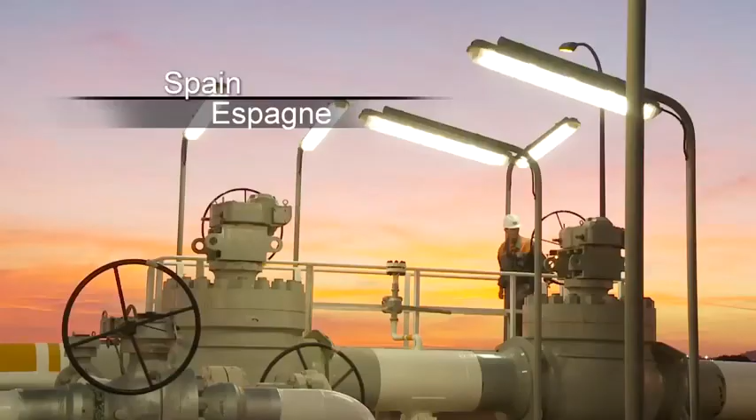The Medgaz project is ambitious. It is a system of transporting natural gas from the producing country, Algeria, to European consumers.

In Algeria, we conceived and constructed a compression station at Beni Saf, situated by the Mediterranean Sea, some 80 kilometers from the city of Oran, 60 from the Moroccan border.

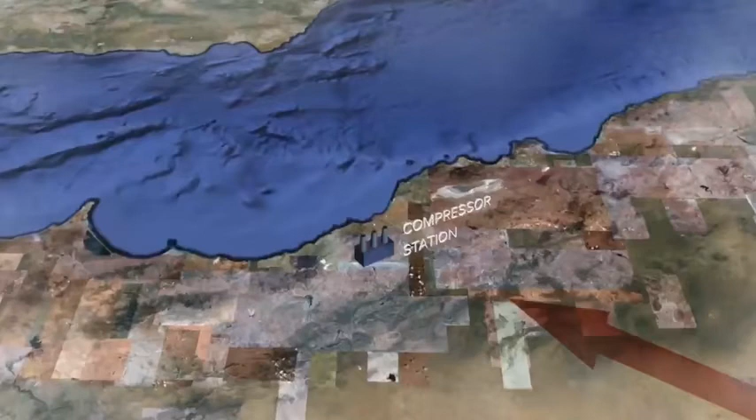The station is supplied with natural gas from Hassi R'Mel by a 48-inch gas pipeline at a pressure of 40 bars. The gas is compressed to a pressure of 200 bars to allow it to cross the Mediterranean Sea to Spain through a 220-kilometer-long 24-inch pipeline submerged to a maximum depth of 2,200 meters.

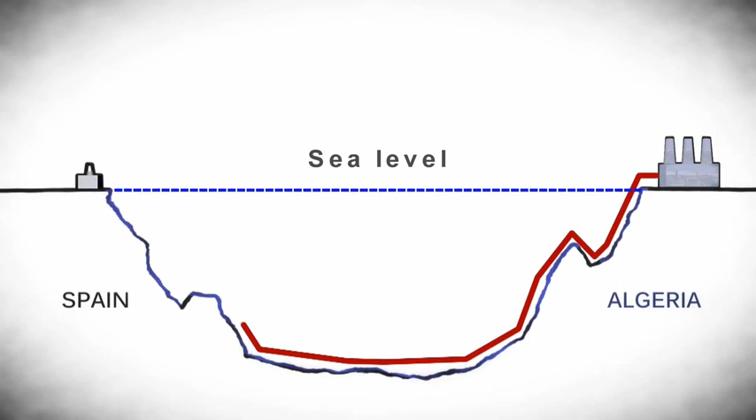A veritable issue, Medgaz will allow a continuous, reliable provision of clean energy to Europe. Declared a priority interest project for the trans-European network in the energy sector by the European Commission, Medgaz answers the growing demand for natural gas throughout Europe.

Made up of Algerian, Spanish and French shareholders, our client Medgaz SA, a company incorporated under Spanish law, has brought together a high level of expertise in technical and human resources through a number of highly reputed international companies.

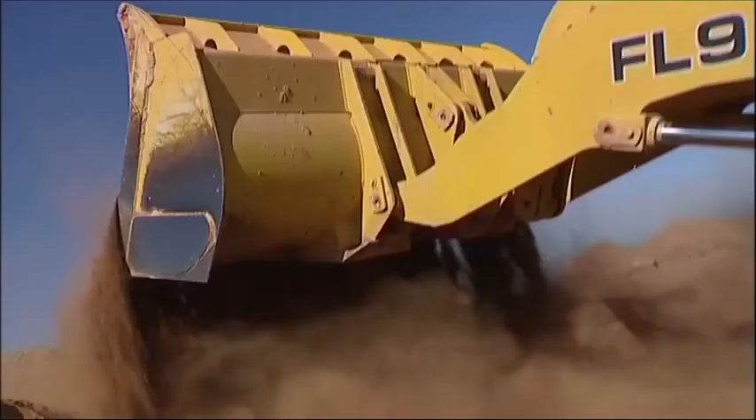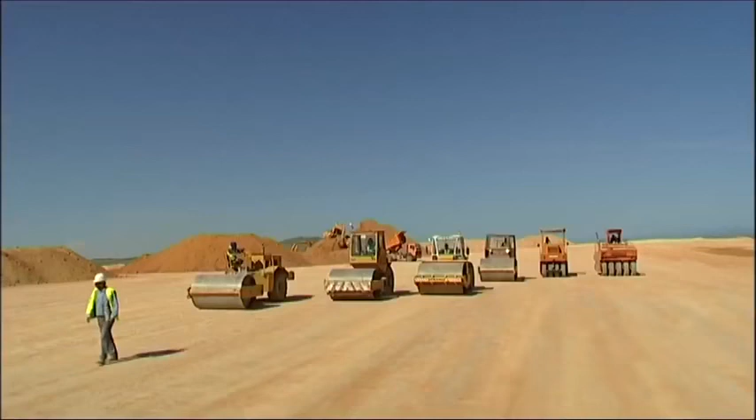SPIECAPAG, in association with a Spanish partner, participated in the project by constructing the compression station at Beni Saf in Algeria.

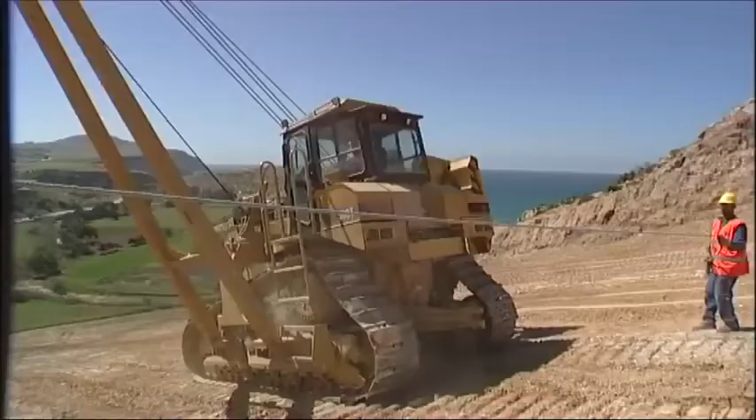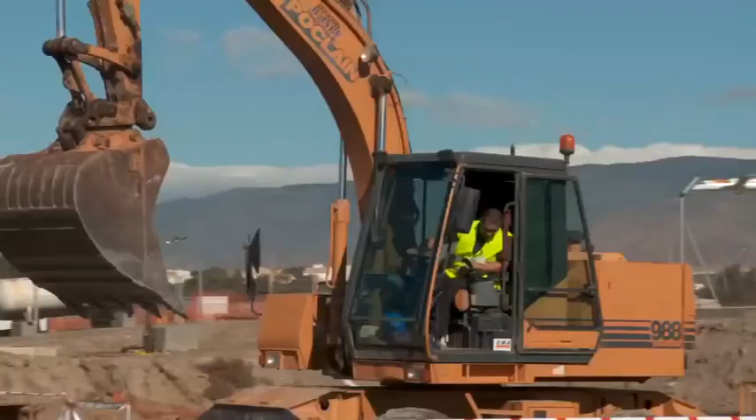This EPC contract, engineering, procurement and construction, was signed in 2006 for a value of 110 million euros, excluding the turbine-driven compressors. A receiving station, OPRT, was also constructed near Almeria in Spain for a value of 40 million euros.

These two stations are connected by an offshore pipeline with a capacity to transport 8 billion cubic meters of gas per year in the first phase. This will increase to 16 billion cubic meters in the second phase.

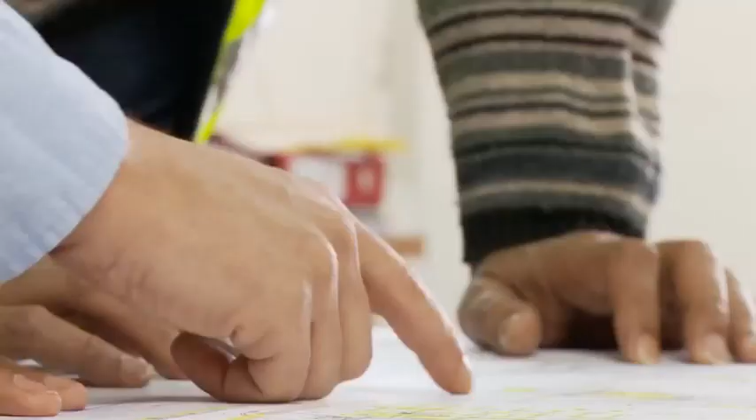Project management was installed in Madrid, close to the client, to supervise the engineering, procurement, as well as the inspection and transportation of the equipment. 160,000 hours of engineering were necessary to design the two sites.

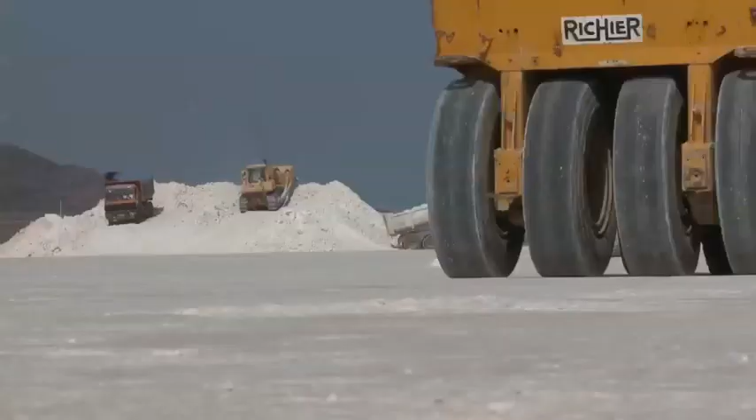No frontiers for procurement. Equipment came from around the world: England for the turbines, France for the skid gas and compressors, Germany for the drivetrain of the turbines, the US for the turbo generators, Spain for the valves, cables and electric panels, Korea for the tubes and the air coolers, and finally Italy for the bulk materials. The customer and certification organizations participated in each of the factory inspections.

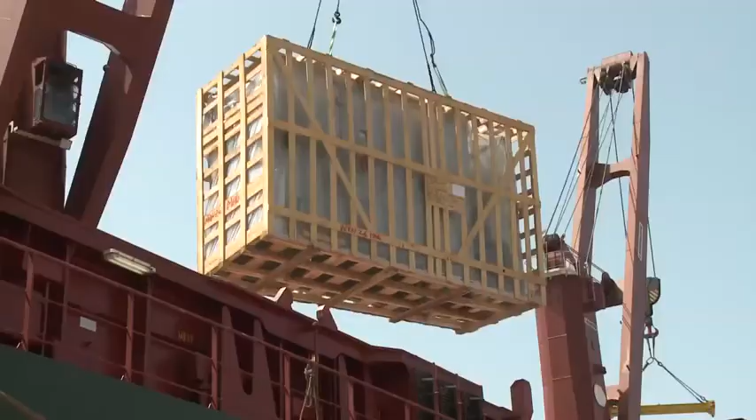Most of the equipment arrived in Algeria by ship. The port of Arzew, to the east of Oran, was chosen to handle the largest pieces of cargo. A project-dedicated office was an essential tool in clearing materials through customs. Every day during the operation of the worksite, tons of equipment passed through here before being transported by road to the site at Beni Saf.

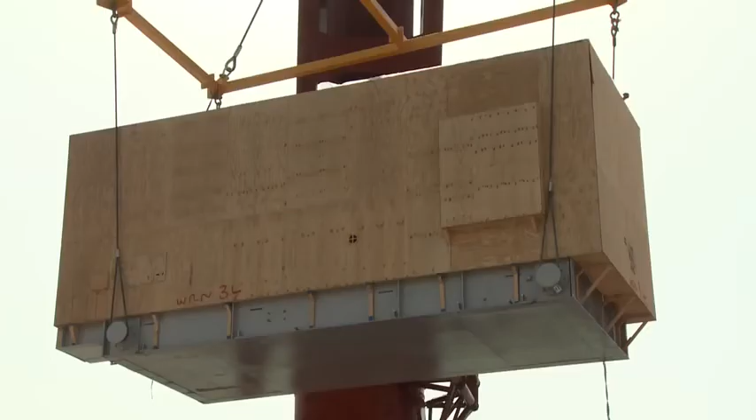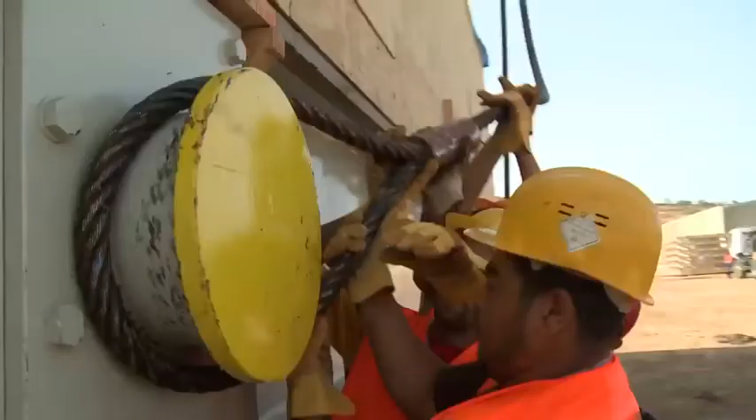August 2008: the 3 turbines and 3 compressors arrived on Algerian territory. Abnormally large crates of about 60 tons each were then transported by exceptional convoy to site, situated about 100 kilometers from the port.

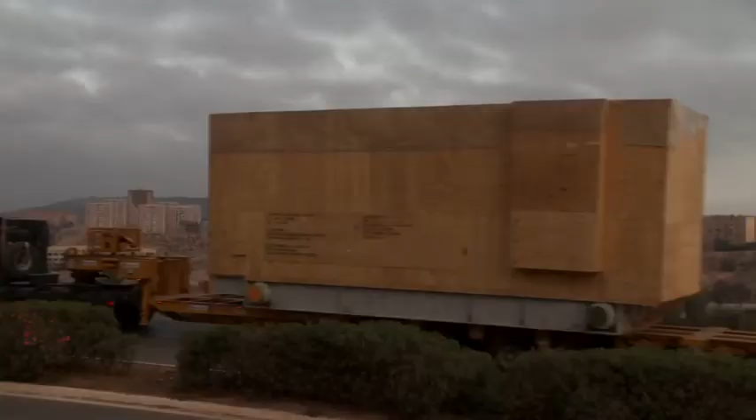SPIECAPAG set up a number of exceptional organizational solutions to ensure that the equipment was delivered to follow the progress of the works. The turbines and compressors are the key pieces of such a project.

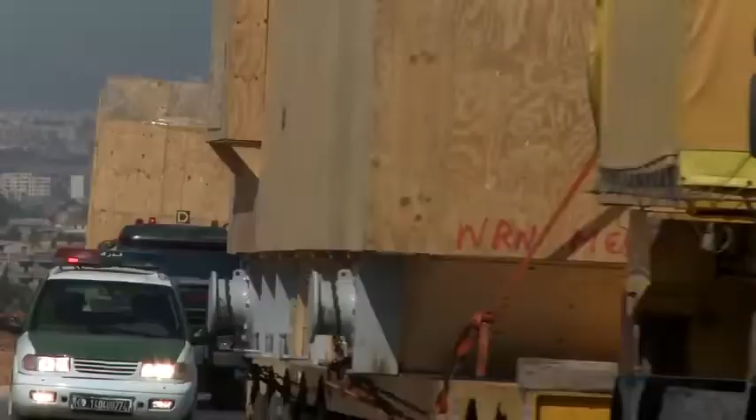Their installation determines the subsequent continuity and progress of the construction works. It's by sharing expertise with its partners that SPIECAPAG accomplished each of the crucial points in the construction of the project.

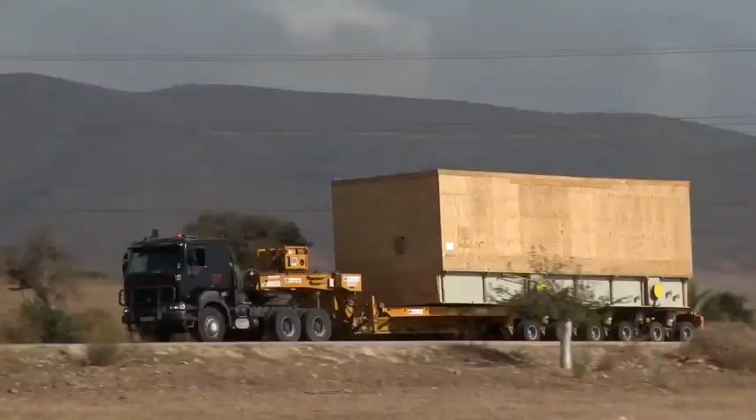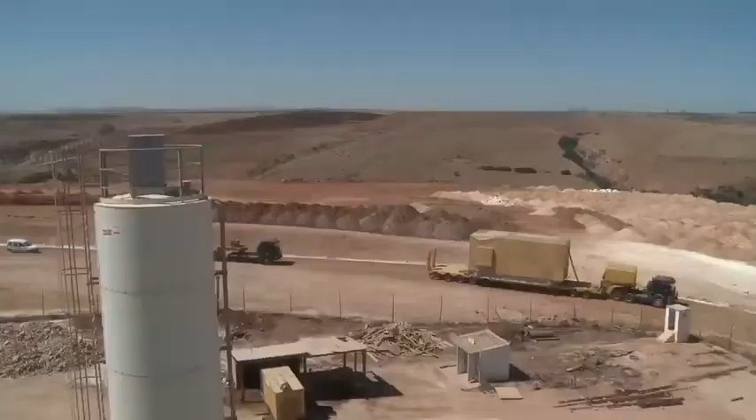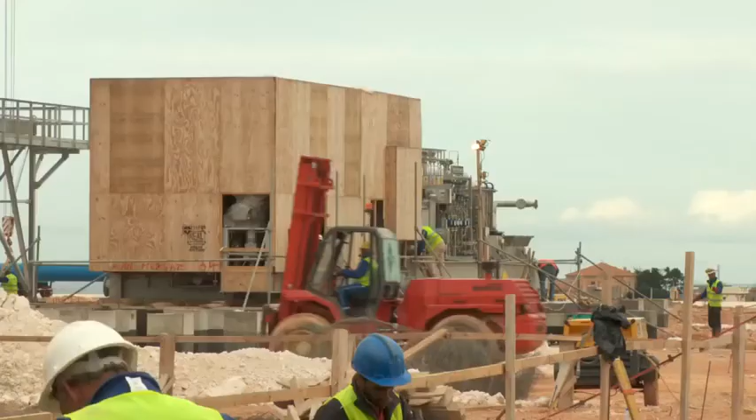At the end of a two-day trip, the 400 tons of equipment was delivered to the site. The BSCS compression station covers an area of 14 hectares.

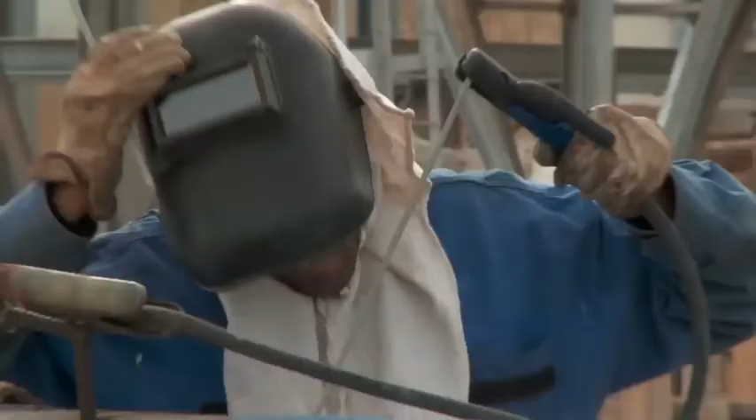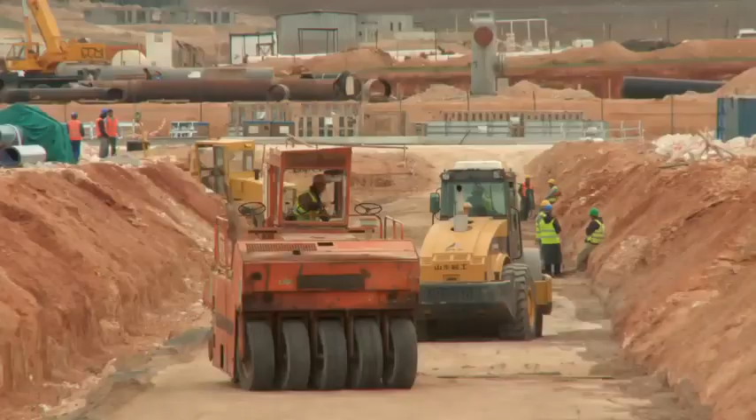All these figures make Medgaz an exceptional project.

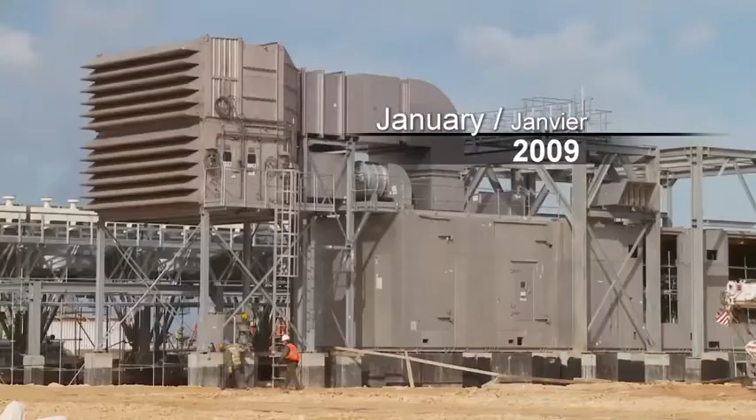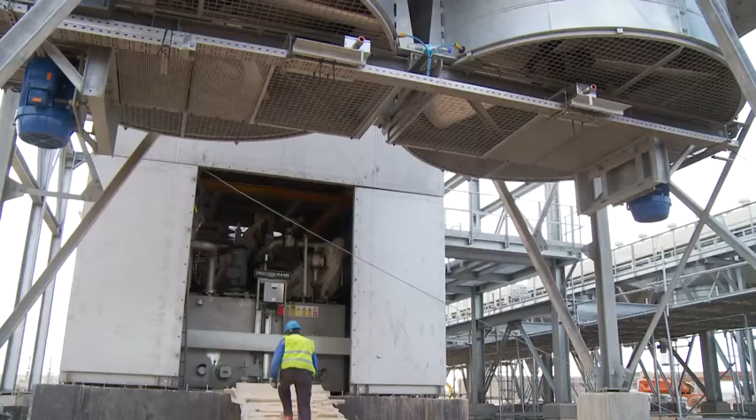SPIECAPAG, a worldwide leader in pipeline construction and associated infrastructures, has developed a unique expertise in work studies and coordination of subcontracting organizations. An industrial compression station is technically a complex work. It represents 120,000 hours of studies.

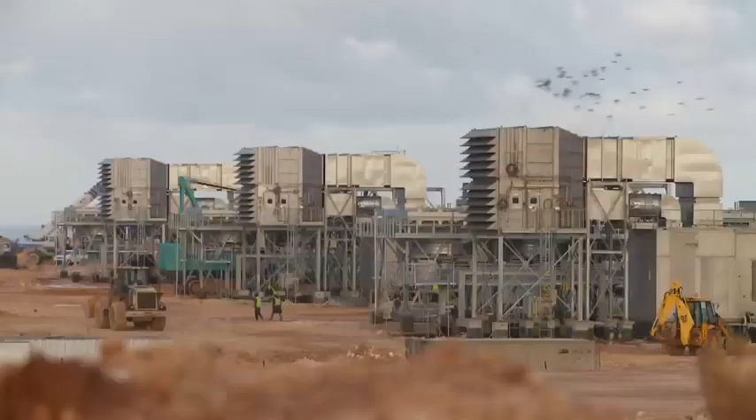In assisting the client, SPIECAPAG develops a complete mastery of work and responds to the most constraining requirements at the highest level of performance. In the end, the two stations of the project represented close to 5 million working hours.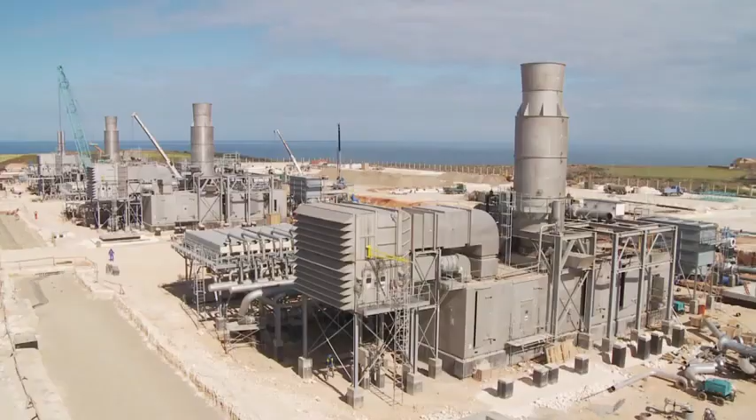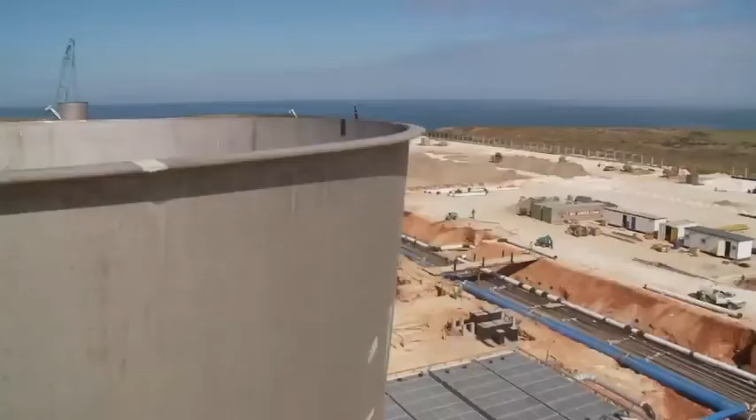The site platform was completed just 1 year ago. It received the 3 units as well as the 3 principal buildings: the control room, electrical building, and the maintenance building.

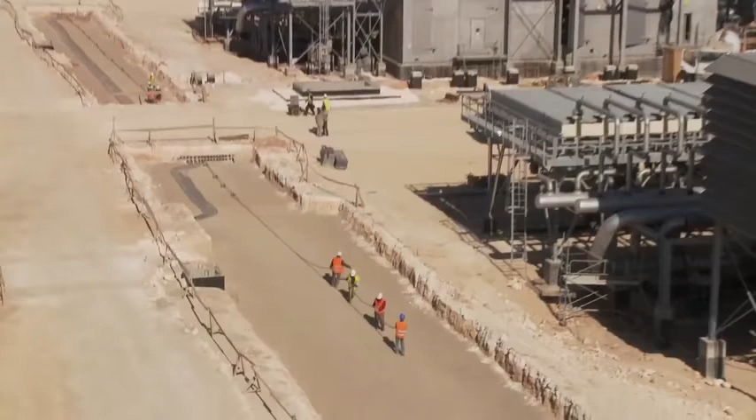The compression station at Beni Saf also has an immense network of cables installed. These are for instrumentation and power supply. They comprise some 350 kilometers.

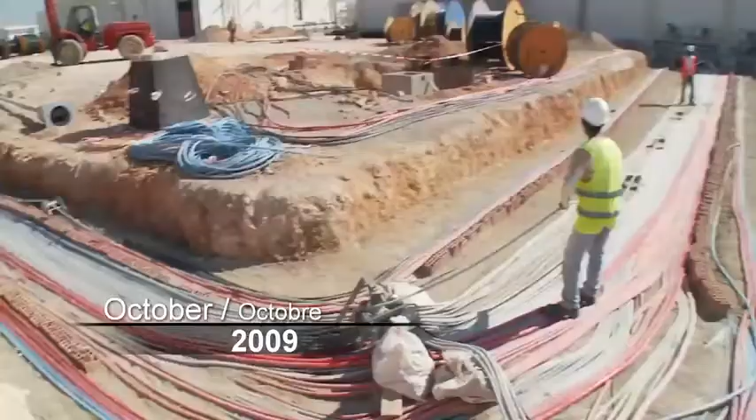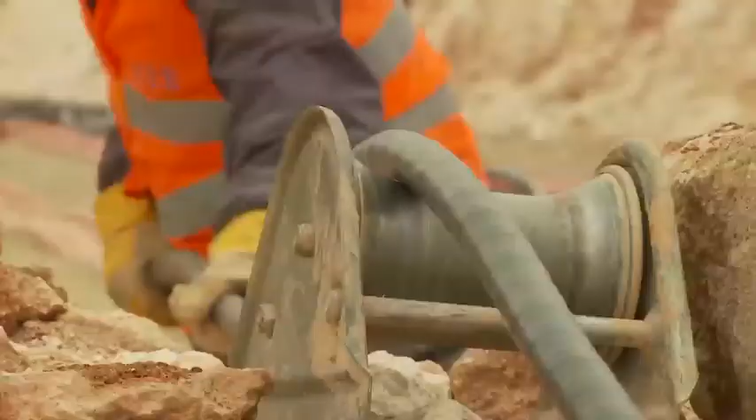A veritable organizational challenge in the opening and closing of numerous trenches is controlled by highly detailed planning in order to minimize the impact to site access.

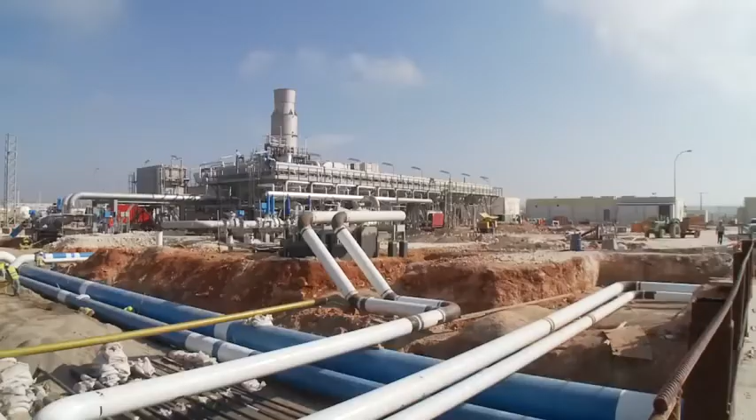Keeping a clear vision of the works allows the SPICAPAG teams to comply with the high performance required to achieve the quality of the works demanded within the planned duration.

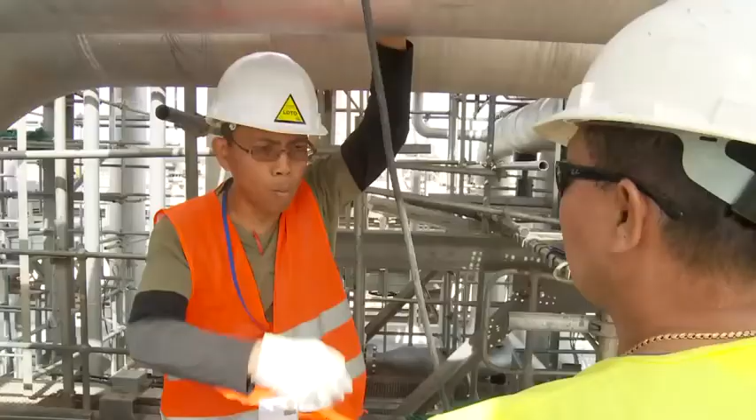Always looking to improve quality, SPICAPAG continually analyzes processes in order to pass with success the different steps towards renewal of the most recent ISO certifications.

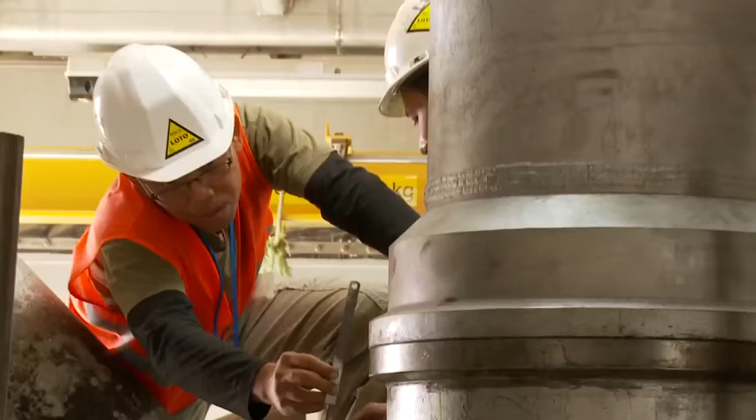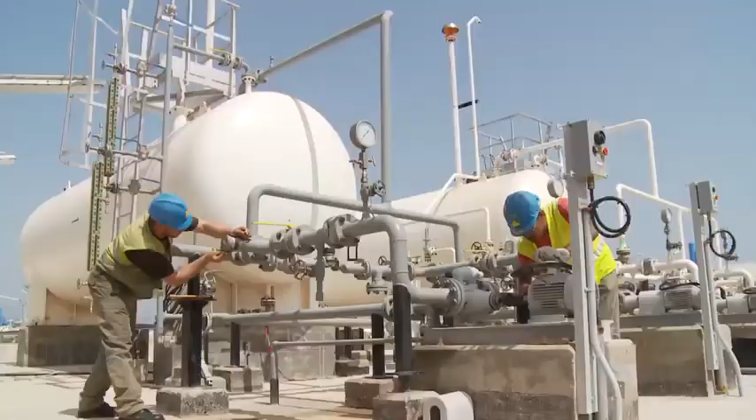In the domain of security, the prevention of risk is an inherent global policy of SPICAPAG. On all its projects, SPICAPAG shares their expertise and experience with the numerous subcontractors.

SPICAPAG participates in social dialogue and imposes a policy. Each participant on site has to be conscious of the importance of safety risks.

Detect situations that are susceptible to be a problem, alert participants and evaluate the risk levels, always improve actions, make people aware, educate, train. Such are the strong points of SPICAPAG regarding risk prevention.

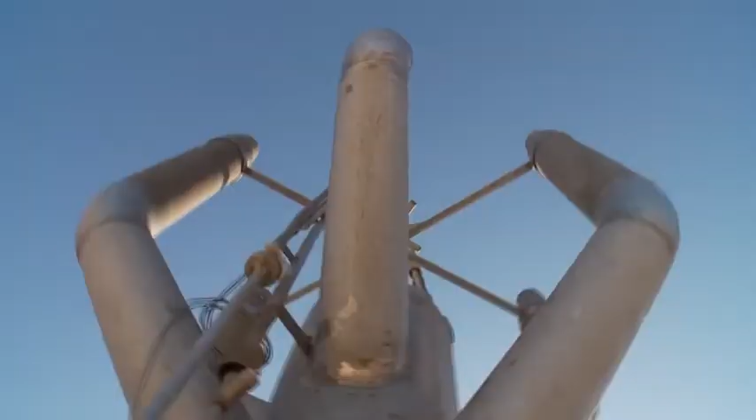SPICAPAG plan training are the tools for prevention. There were no serious accidents on the project Medgaz. Implication by all the personnel is the basis of these good results.

SPICAPAG practices the sustainable development policy of the Group Vinci. It undertakes to reduce the impact due to activity during the work sites. A program of training and implication of the personnel is set up.

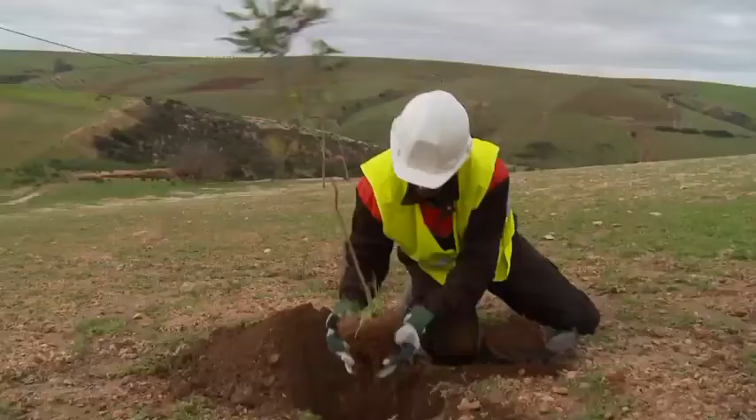In the proximity of the station, the planting of trees and shrubs will in time form a true screen of greenery opposite the Mediterranean coast.

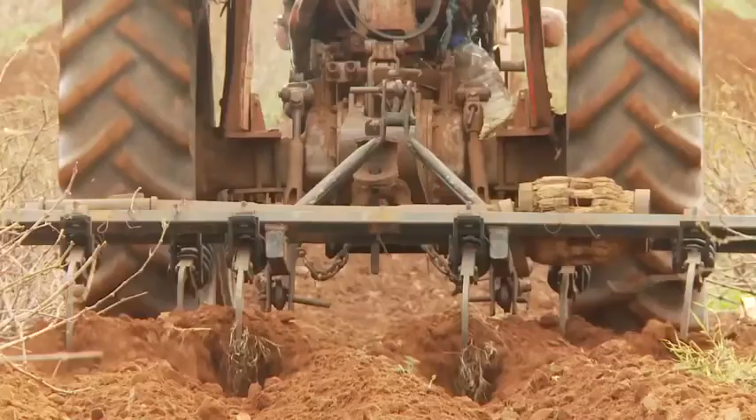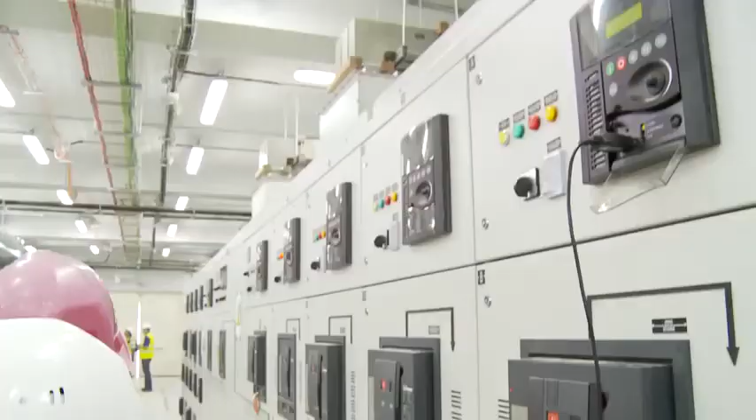SPICAPAG promotes the transfer of expertise always as a matter of priority. On the project Medgaz, SPICAPAG elaborated specific contents of training program on the basis of the client's technical documents.

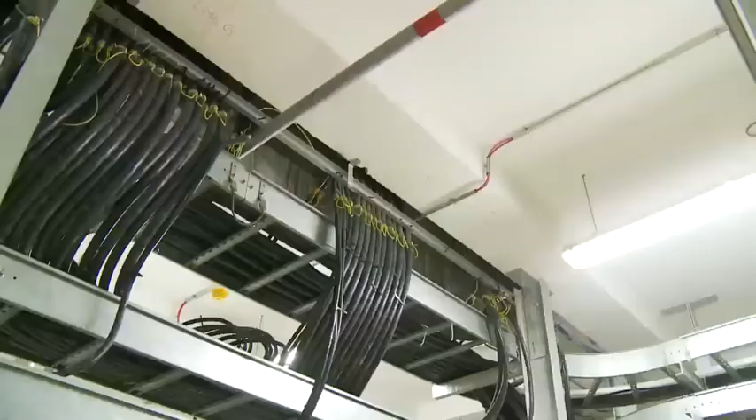Theoretical and practical training is supported by experimentation regarding the evaluation of knowledge. Altogether, more than 20,000 hours of training were expended on this project.

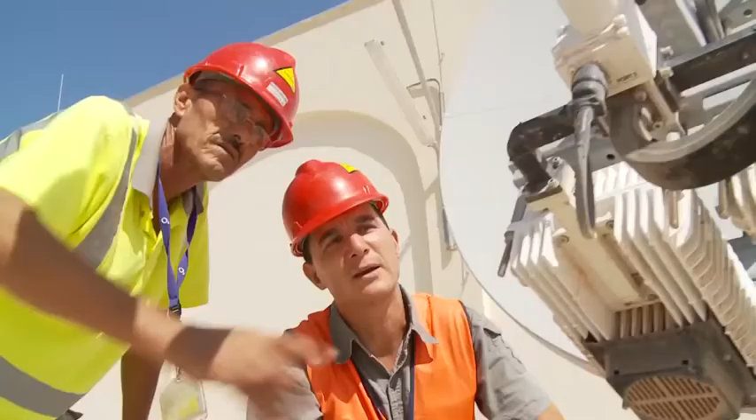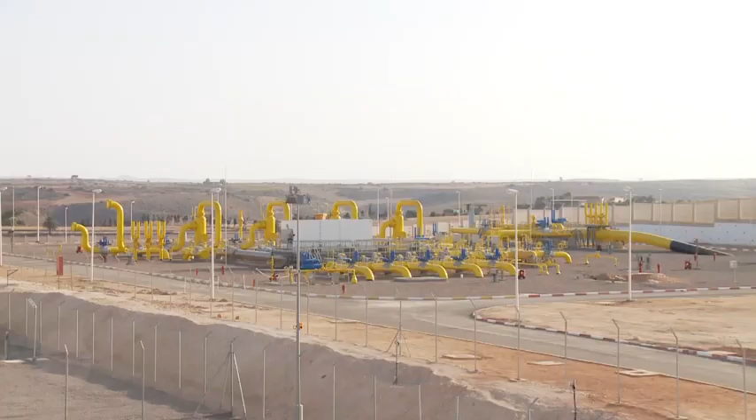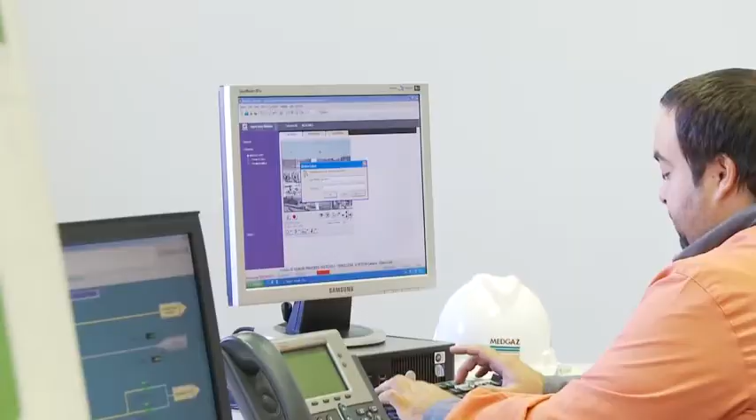October 2010, the gas arrives at the Beni Saf station from the gas fields of Hassi R'Mel. March 1st, 2011, the gas arrives in Spain after crossing the Mediterranean in a few minutes. A new network of energy towards Europe is opened. The Medgaz project has turned a dream into a reality.